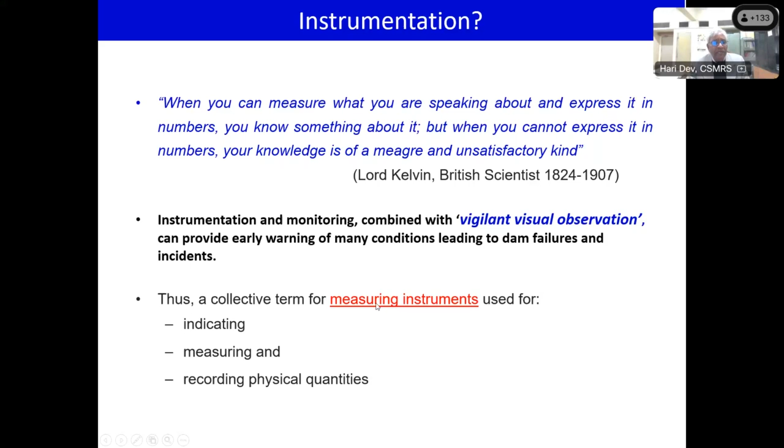Thus we can say instrumentation is the collective term for measuring instruments which indicate something. Let me clarify: these instruments indicate something in terms of numbers, and those numbers have to be further analyzed and interpreted with regard to our structure and our design values. Then those things can be analyzed and reported. So instrumentation is basically, though instruments indicate something, these parameters are measured, and these instruments record those parameters in physical quantities.

Coming to the number of large dams in India, India ranks third in the world in terms of large dams, this is data from 2023. So almost 5,700 large dams exist in India. But the status of instrumentation is, I'd say, quite dismal. Though field instrumentation initially started way back in 1930, still if I talk in terms of the dam population in India, almost about 5% of these dams are instrumented.

And coming to meaningful instrumentation, out of that 5% also, our experience says it is very dismal. When I say very dismal, it is a term that relates to the installation and monitoring. If we do monitoring, then we don't do any analysis or interpretation. And even when we do some interpretation, the data is not being properly utilized for design verification or for rehabilitation or remedial measures.

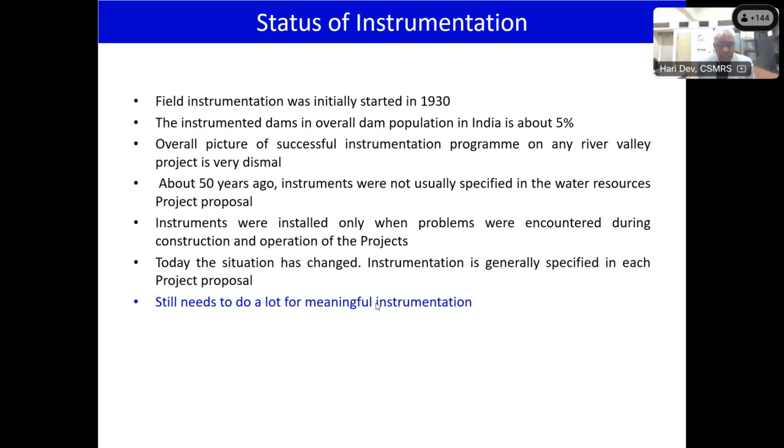Today the situation has changed, but instrumentation is generally specified in each project proposal, and our Dam Safety Act also stipulates that instrumentation should be part and parcel of our dams. So there is still a lot to do for meaningful instrumentation. Our experience shows we are involved in instrumentation during the construction of dams, during operation and maintenance, and during the planning stage also. So our experience is that we still need to do a lot for meaningful instrumentation.

So then what he does, he just takes out one thermometer or one stethoscope and measures something, and if he feels something, then he recommends some sort of further investigations, and on the basis of those investigations, he recommends the treatment. But suppose he acts on wrong information which you provide to him, that may be disastrous.

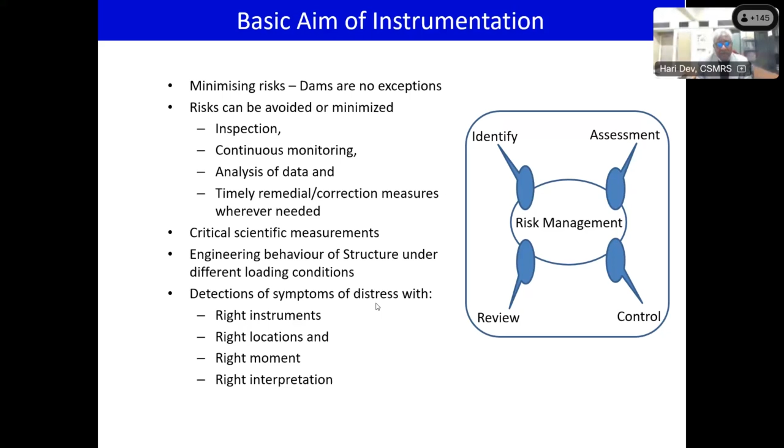So risk management includes identifying those risks, then assessment of those risks, then controlling those risks, and finally you review those control measures. So the purpose of instrumentation is detecting distress at an early and preventable stage.

So instrumentation doesn't protect our structures as a whole, but protects in an indirect way. It provides information at an earlier stage, when distress can be prevented through recording quantitative data analysis. The secondary purpose of instrumentation is for designers.

Designers take input data from geotechnical investigations and material properties, but sometimes they assume certain parameters, taking those derived from empirical correlations or earlier experiences. So it is not necessary that all the input data being used has actually been obtained from tests performed in the field or lab - certain parameters are still assumed by the designer based upon experience.

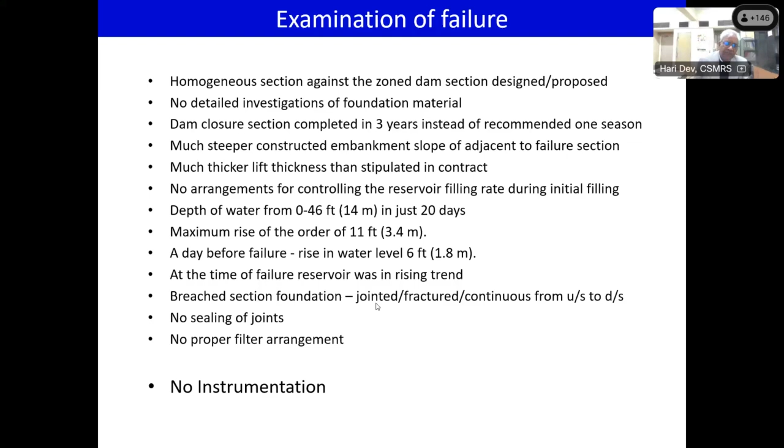No instrumentation was designed. Had instrumentation been taken up in the earthen dam, if we had installed piezometers at certain sections, it would have provided information about the piezometric heads at different sections on the downstream slope. From there, you get an idea of how your phreatic surface is being generated, so you can get information before the failure actually takes place, and avoid the failure rather.

So after that, the rehabilitation started. Of course, rehabilitation is time consuming, costly, and requires additional resources. Rehabilitation works were taken up, and during the rehabilitation stage, detailed foundation investigations were done, curtain grouting was done, mapping of the subsurface ground conditions was done, and a geosynthetic layer was installed. So we took all the precautions and revised the design also. It was rehabilitated back in '22, and now it's in operational mode.

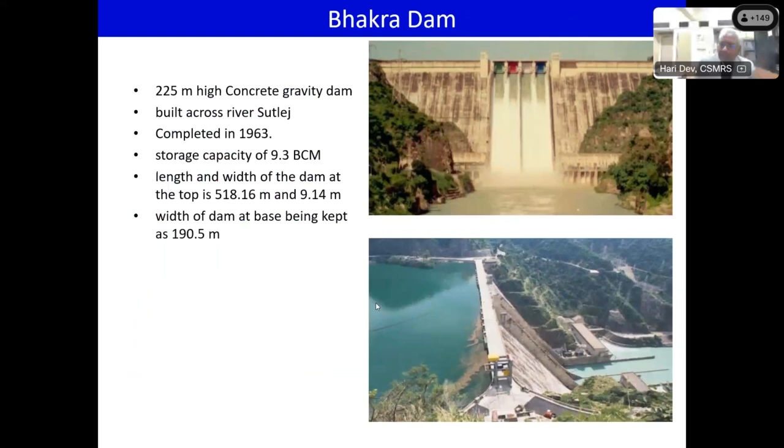Coming on to Bhakra Dam, it's a 225-meter high concrete gravity dam built across river Sutlej, completed in 1963, with a storage capacity of 9.3 BCM. Why I am taking this Bhakra Dam example is because it was designed by USBR, Colorado, USA, by trial load analysis.

After completion of the project, the reanalysis was again done with respect to stability and structural adequacy. The computed maximum deflection of the dam, as per the studies in 1964 after reanalysis, as specified by USBR, was 1.53 inches, 38.86 mm for seismic condition, and 1.03 inches, 26 millimeter for non-seismic condition.

Deflection in block 20, which is the deepest block, where the normal plumb line is situated, shows an increasing trend. During the years 1995, '98, 2008, '10, 2011, '13, the maximum permissible deflection has been surpassed. The maximum deflection measured so far is 1.11 inches, 28 millimeter, observed at a reservoir level of 1670 feet or 509 meter.

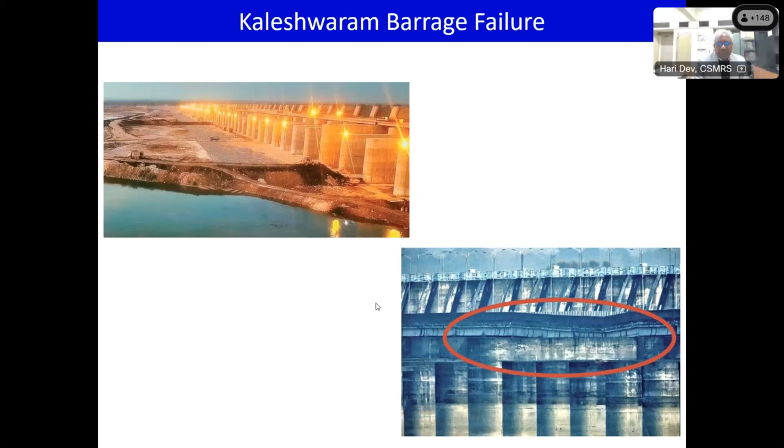This is one of the barrages, Medigadda barrage in Kaleshwaram dam. One of the blocks sunk by more than around 1.2 meter. Although investigations into the causes of distress and remedial measures are ongoing, we will probably get a solution and be able to rehabilitate this structure for use.

So from dam failures, we learn some lessons. Post-failure measures are much costlier than ensuring dam safety at an early stage. Suppose we do instrumentation during construction or during the operational stage, then that will be good for the structure.

Failures are not abrupt; rather, they are progressive in nature, so it doesn't fail abruptly. It gives ample time before the stresses and deformations exceed the maximum permissible values.

Ultimately, during failure, we witness loss of life, property damage, or environmental degradation, especially for high hazard dams near populated areas. So many things are at stake. Though the probability of dam failure is quite low, the consequences are very high, and sometimes devastating in nature.

Coming back to the objective of instrumentation, the basic aim is to develop safe, cost-effective, and reliable structures. Instrumentation can play a vital role in this. It can be used for site characterization, as many parameters are defined on the basis of field and lab instruments.

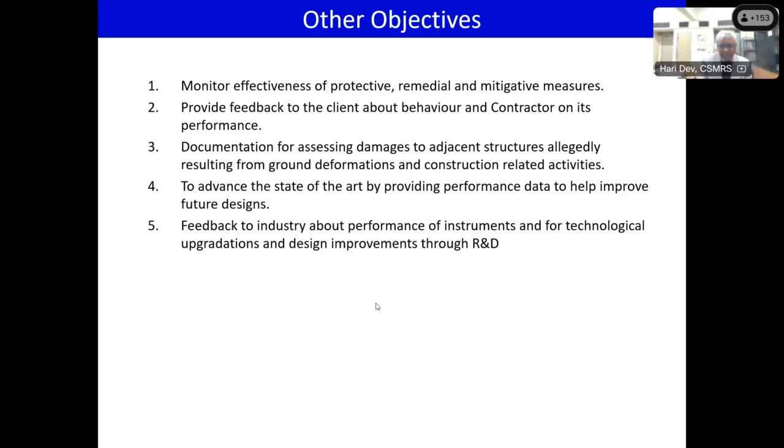Types of instruments can be mechanical, electrical, optical, or pneumatic. I won't say which one is more preferable, but each of these types can be utilized in different kinds of situations. One has to specify what kind of instrument will be more beneficial for their own structure.

Regarding observations, these can be done remotely or near the sensors, or the signal can be transmitted through a rod, through a liquid column, or through electrical optical cable. So many things are there—those technological advances are already available.

Planning and design of instrumentation: the first and foremost thing is to define the geotechnical questions—what kind of information, what kind of parameter you want to monitor for a particular structure, and what will be their range and accuracies. Select the parameter desired for the design, and then define critical values.

Critical values means what are the permissible values, and what are the critical locations where the instruments can be installed?

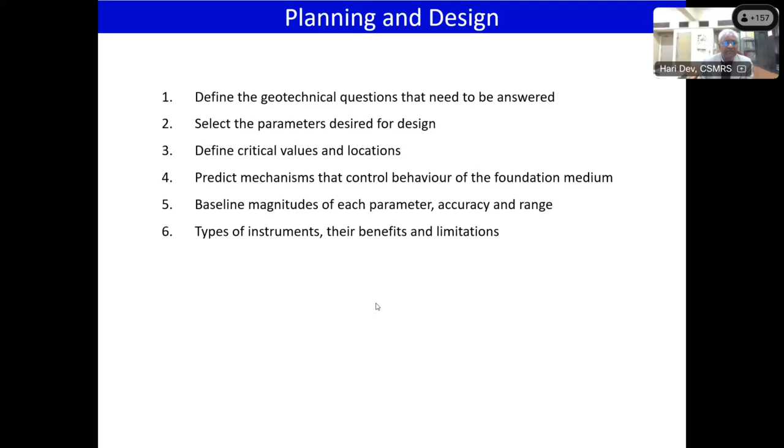Coming to the first thing, the instrumentation for displacement, load, deformation, convergence, any parameter, or water pressure, inclination—you decide upon it and then design and specify the instruments.

Then construction, monitoring and control—their design, verification and control, treatment control, and contractors' method statements, then third-party approvals, installation, commissioning, and baseline readings have to be defined.

Then you obtain and process the data. After installation of instruments, you obtain some data and then process it. That data is then used for a progress report sent to the parties. If the data is within the safe limits, then you straightaway report it to them.

If the measured data or parameters exceed the trigger values or permissible values, or the rate of change of any parameter is quite high, then you have to do some brainstorming and assess the instrument first.

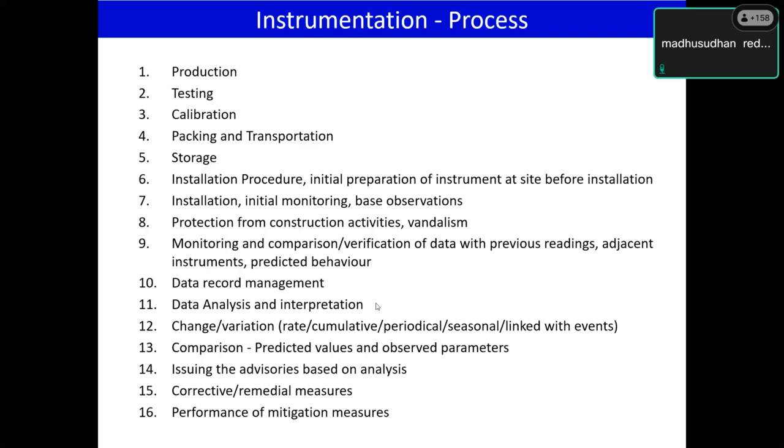So while production of instruments in the... I think somebody is unmuted. Please mute yourself. Dasam, please, somebody is still speaking. Yeah, please mute them.

So coming on to the process of instrumentation, it starts with the production itself. From the manufacturing unit, the instruments are fabricated or produced in the industry or the factory, and then those are tested and calibrated. Calibration is the most important thing. That is the first thing which tells us the performance of the instrument.

Then after calibration, packing and transportation to the project site, then storage at the project site itself. It has to be properly stored as per the specifications. Then installation procedure, initial preparation of the instrument at site before the installation.

Initial monitoring or the base observation are important. Base observations, why is this important? So that later observations are totally based upon the base observation. Protection from the construction activities, these are to be protected from vandalism. Monitoring and comparison or verification of data with previous observations as well as with adjacent instruments.

Why do I say adjacent instruments? Because sometimes if you see some abrupt changes in the observations, you need to compare it with adjacent instruments or some other parameters also, so that you are confident that the data is correct, for correctness of the data.

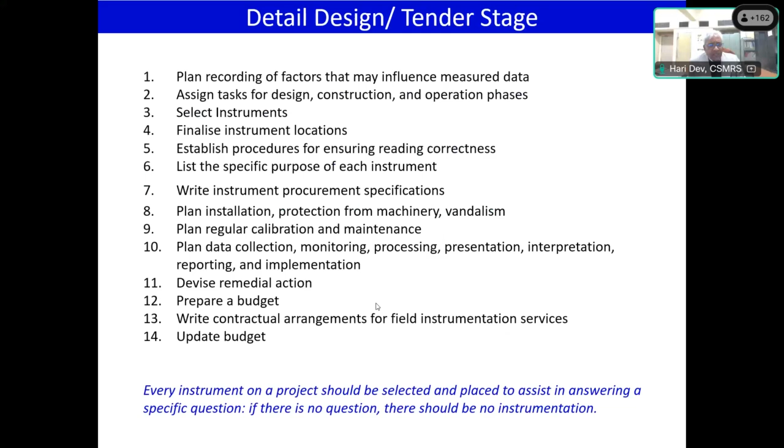So mind it, every instrument on a project should be selected and placed to assist in answering a specific question. Suppose there is no question, then there will be no instrumentation.

So in the design stage, you again identify the problems, identify the desired parameters, planning of instruments, then identify the suitable equipment, suitable locations, and assign responsibilities. During the design stage itself, you assign the responsibilities, how the data will be monitored and how the data will be analyzed and reported.

One thing is there - during design stage, we can visit the manufacturing plant also. So we can have some information about the technical specifications, for finalization of the technical specifications, that may be helpful.

In the construction stage also, apart from deciding about the instrument, their specifications and process of installation and other things have been defined. But now the monitoring - the installation and the monitoring - is more important. So the monitoring has to be done by the agency or by the owner itself. That needs to be defined.

Suppose the developer doesn't have the adequate capacity, then we can have an inbuilt parameter in the contract so that we can have persons from the manufacturing agency or the vendor for installation and monitoring of the instruments also.

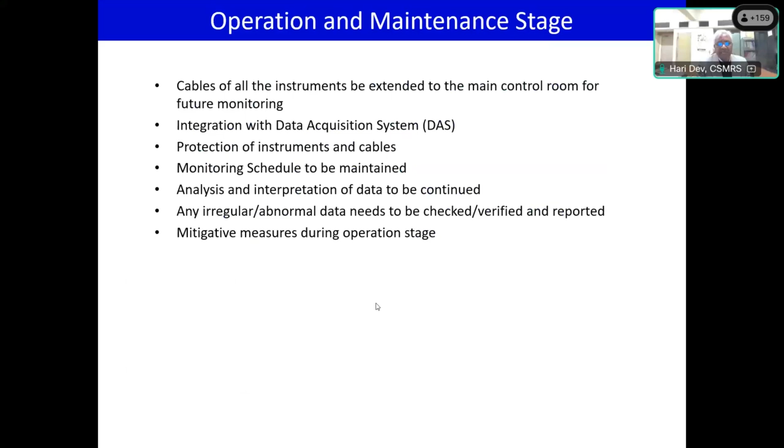In the first reservoir filling, this indicates early unusual behavior—such as the development of pore pressures in earthen dams, uplift pressures in concrete gravity dams, and dam deflections. Those things have to be monitored for satisfactory performance of the structure.

Then, understanding actual response—some new monitoring parameters, points, or components may be required. Maybe some instruments may be required on the dam abutments also during that period. So those things continue, and during the operational stage performance monitoring should continue, comparing actual behavior with design assumptions. Some parameters may not be required to monitor further, so we can redefine the frequency of monitoring.

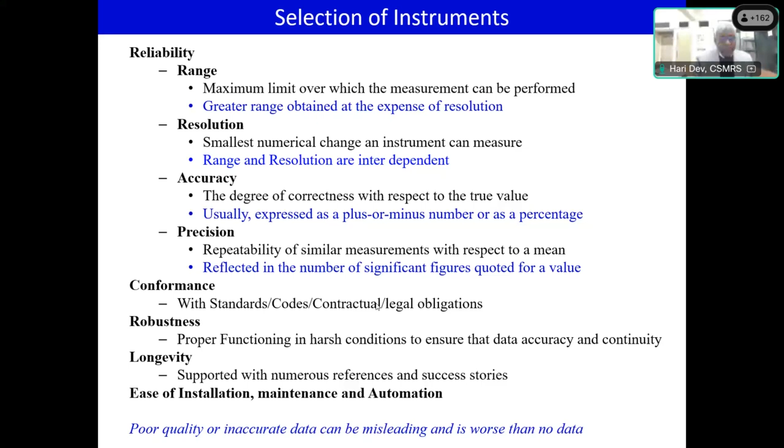One thing we should understand: poor quality or inaccurate data can be misleading and is worse than no data. No data is better than poor quality or inferior quality data. So, some principles of good measurements follow.

Hello? Somebody is unmuted. Yeah, please mute him. Yeah.

Some good principles: make the right measurement, choose the right instrument, the right people, demonstrable consistency, regular review, and right measurement procedures. One should not go by shortcuts.

These are some common problems in instrumentation: sometimes instruments do not work, sometimes they are not protected and vandalism occurs, sometimes there is wrong selection of instruments, lack of coordination between instrumentation and civil construction agencies, and sometimes we select too sophisticated instruments which may not be needed.

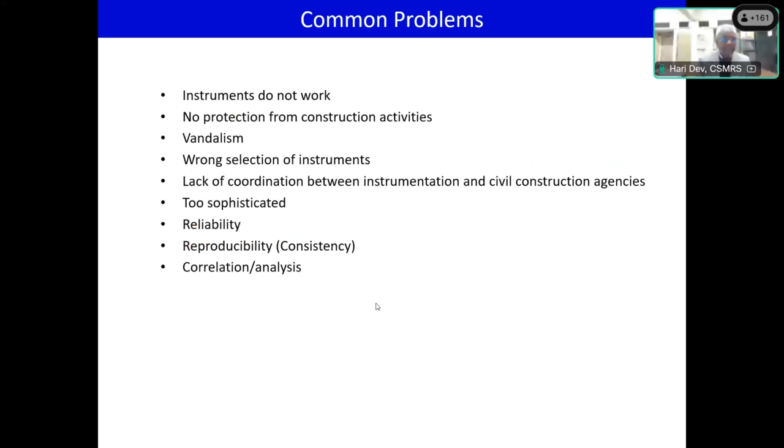Reliability, reproducibility, and correlation are some of the factors that affect the data. Inaccurate measurements, inferior measurements, selection of wrong instruments, improper locations, improper installation, delayed monitoring, and other things—these are the things which affect the quality of data.

Regarding presentation of data, many times we present data in tabular form, which is not a good practice. To me, graphical presentation is the best method. In graphical presentation, we can have a look at the earlier observation and the current observation all together, plotted since the installation of the instrument.

So we can have the assessment of the performance of the structure in various phases of construction.

In graphical presentation, there are two ways: cumulative change in any parameter, and rate of change in that parameter. Both should be included in the graphical presentation. Observed trends should be compared with predicted trends, and key designers should be involved and kept informed all the time. The data should be shared with the designers and the construction agency as well.

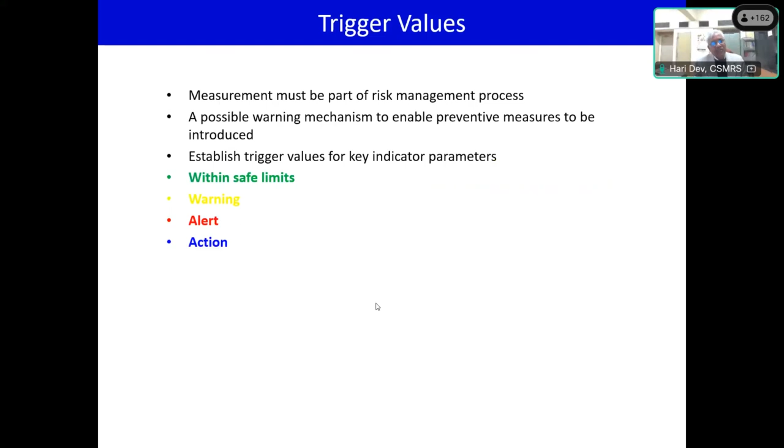Trigger values and measurement must be part of the risk management process, so we need to define trigger values. Usually designers define the permissible values, maximum trigger values, or warning values, and every instrument has to be provided with these. At what change in any parameter can we say it is within safe limits, or some warning is there, or alert values have already been achieved and it's time for action. So we need to define these flag indicators for each and every instrument. This can be done; it's not a big thing, but it should be followed.

So, setting the trigger values: observed variation in any parameter falling within expected limits is the baseline level. Warning level is when it exceeds the baseline level, and alarm exceeds the warning level.

Let us take the example of a load cell installed on a rock bolt. Designers may define different values, but just for explanation: the baseline value may be defined such that if it doesn't exceed 50% of the yield capacity, it is within safe limits. Warning is when it exceeds 50% of the yield capacity of the bolt, and we can issue a warning signal. Alarm or alert values are when the load surpasses 62.5% or 70%, whatsoever, of the yield capacity. Then it's time for action and time to define the causes of this distress or increase in load, and one has to take remedial measures.

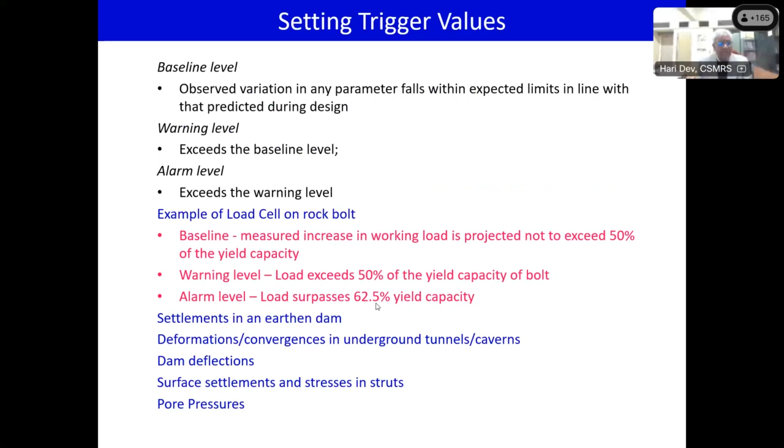Similarly, for settlements in an earthen dam, we normally define that 1% of the height of the dam can be the maximum settlement, but depending upon the kind of material, this can be lesser. During instrumentation, you can regularly watch these dam deflections and other parameters, so those values need to be defined at this stage.

Frequency of monitoring can depend upon hazard potential, age or condition of the dam, variation in loading conditions, history of abnormal behavior, seismic risk, different phases, nature of data, and climatic or seasonal variations.

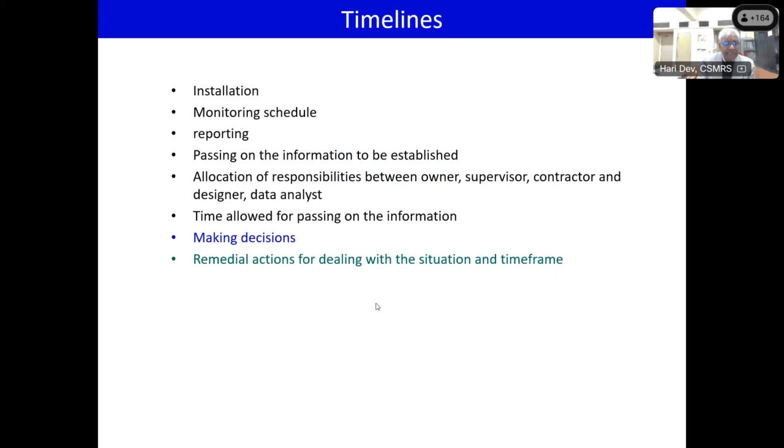Timelines are very important in instrumentation: timelines for installation, monitoring schedule, reporting, passing information to the concerned parties, and making decisions. These timelines at each and every level have to be followed.

So, good practices I have already covered; this part is over now. I will switch over to discuss the case studies.

Coming to the second part, implementation of instrumentation: in this part I will cover instrumentation for a complete project. I was on deputation to the Tala Hydroelectric Project in Bhutan, where we were associated with instrumentation of the dam and underground structures like the desilting chamber, HRT, powerhouse, and others. Apart from quality control and quality assurance, we were responsible for instrumentation of the complete project. I'll share that case study with all of you.

Apart from that, I'll share some other case studies of earthen dams as well as some underground structures, and I'll try to cover them.

Coming to dams in different phases, I've already discussed concrete gravity dams. Before going to the case studies, let us understand the different modes of failure in concrete or masonry dams. Common causes are overtopping, which might occur due to inadequate spillway capacity or issues with the gate. Sometimes the gates get stuck and we are not able to lift them, which may also be one of the reasons for overtopping or failure.

Spillway blockage resulting in erosion of the foundation or at the toe or even on the abutments, causing washout of abutment. Overturning is another way the dam can fail, resulting from high stresses at the toe. Foundation leakage is another factor or cause of failure in concrete or masonry dams.

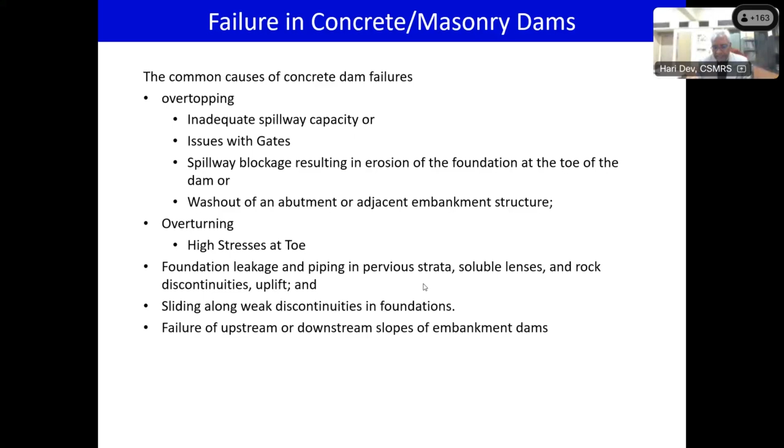Sliding along weak discontinuities in foundation is another cause. That's why we carry out in situ investigations for shear strength of foundation, both at the rock to rock interface as well as concrete to rock interface. Sometimes failure of upstream or downstream slopes of the embankment may also cause failure of the dam. These are the common causes of failure in concrete and masonry dams.

Now I'll go straight to the Tala Hydroelectric Project case study. This is the Tala Hydroelectric Project in Bhutan, a 1020 megawatt hydroelectric project under operation right now. The project was under construction from 1997 to 2006, and the first unit was commissioned in 2006. It contains a 92-meter high concrete gravity dam.

Extensive instrumentation has been installed in this dam, and our Central Water Commission was the main designer of the Tala Hydroelectric Project. Installed capacity is 1020 megawatt, and the gross head is 860 meters, which is the head to which the turbine units have been subjected.

It contains 6 units, 3 underground desilting chambers, and a 23.2 kilometer long head race tunnel, 6.8 meter diameter, mainly RCC lined, though some sections are PCC lined. It also contains a surge shaft and 4 steel lined pressure shafts, each measuring more than 1 kilometer in length, an underground powerhouse and transformer hall cavern, and a tail race tunnel.

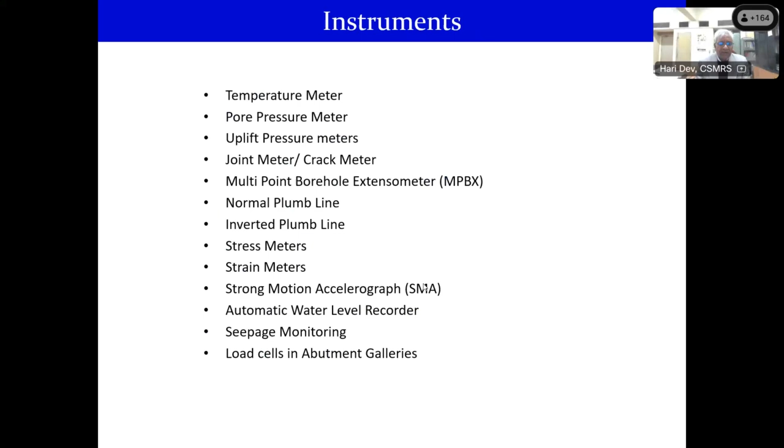These are the kinds of instruments installed in our dam. First I will cover the dam, then go to the underground structures. Temperature meters, pore pressure meters for measuring pore pressure of the foundation, uplift pressure meters, joint meters, crack meters at block joints, multi-point borehole extensometers in the dam galleries and on the abutments, normal and inverted plumb lines, stress meters, strain meters, strong motion accelerographs, automatic water level recorders, seepage monitoring, and load cells in abutment galleries. These are the kinds of instruments installed there.

This is the key feature of the contract, because this is the case study of a successful project with successful instrumentation. So how could this have been made successful? Some of the key features I would like to share with you.

Normally in our contracts, instrumentation is made a part or subset of the civil contract, meaning the instrumentation work is awarded alongside the civil contract, and the agency responsible for construction is also responsible for installation and monitoring of the instruments. This is not good practice, because the agency's tendency will be to push for higher or faster progress, while installation of instruments may hamper or retard the progress of construction.

So at Tala we included the supply, installation, and monitoring of instruments as a separate contract. One clause required the agency to depute a certified, experienced civil engineer at the project site responsible for preparation, installation of instruments, and monitoring of data. The salary of that person, along with one helper, was paid every month by the Tala Hydroelectric Project Authority.

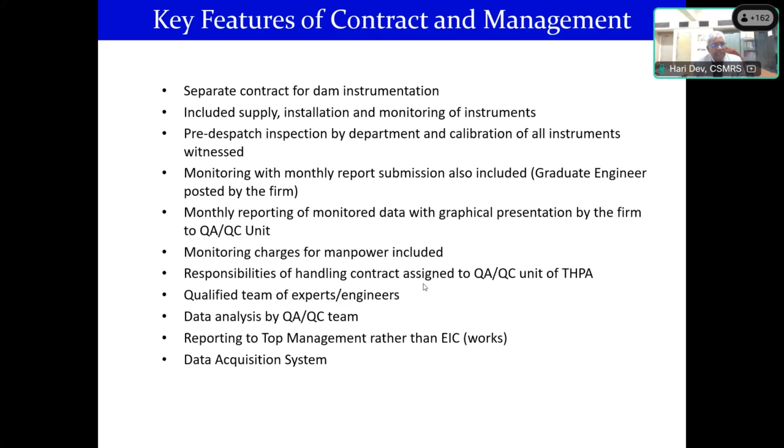One thing I would like to add, the agency's bills were being processed only after confirming that the instruments had been installed satisfactorily, and that they were giving meaningful data and being monitored. Only then were we processing the bills of the firm.

These are the initiatives, and for some other initiatives, coordination with the construction team, or protection from construction activities, remedial measures were undertaken if felt necessary. These were discussed during monthly progress review meetings, taken by the managing director alongside all the EICs, where the instrumentation data was also deliberated.

So these are the kind of instruments which have been installed. Around 296 instruments were proposed initially, 277 instruments were installed, and out of which, when we left in 2006 after completing our deputation period, 272 instruments were working perfectly and giving very useful data. That is the successful story of instrumentation of Tala Dam.

So 2 blocks were chosen for dam instrumentation. One is block 2, which is a non-overflow block, and the other is block 5, which is the overflow block.

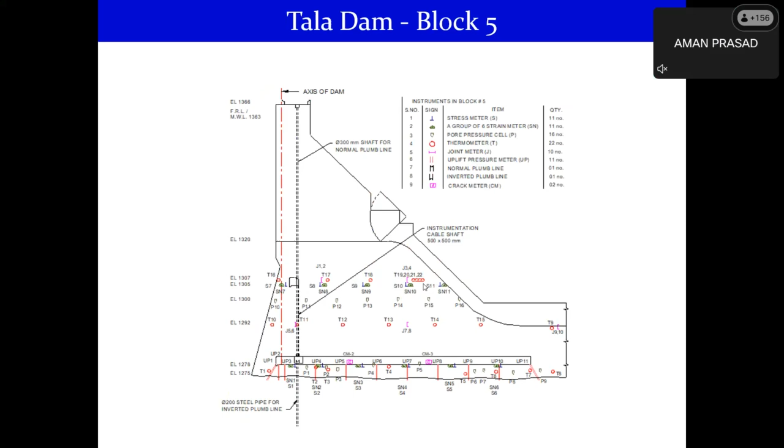Somebody is talking, I think. Let us mute, or kindly mute yourself. Some voice is coming, can you mute yourself please? Hari Dev sir, please go ahead. Some actual regular voice is coming, it's quite loud. Some disturbance there, can you mute it? Yes, all are requested, please mute yourself.

Okay, so I'll continue. So as I have already told, 2 blocks were chosen for maximum number of installation of instruments - block 2 being the non-overflow block, and block 5 being the overflow block.

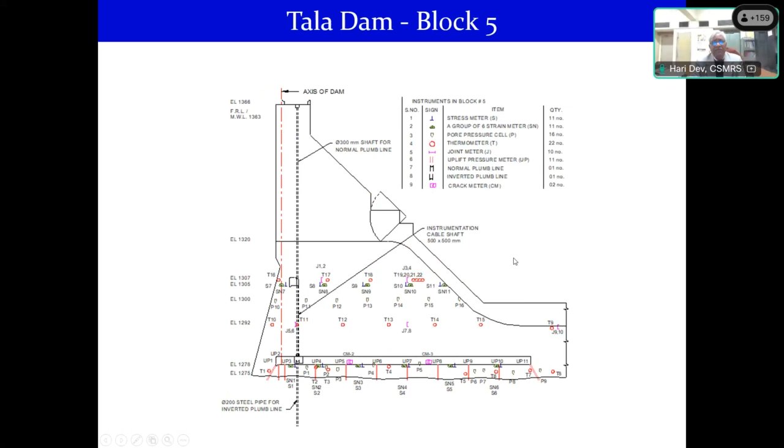These include instruments like uplift pressure meters, pore pressure meters, stress and strain meters, temperature meters, normal plumb line, inverted plumb line, joint meters, and crack meters wherever we observed some cracks. So all those instruments were included there.

Coming on to temperature meters - these have got very good significance and importance in our concrete gravity dam. In Tala project, the cement in mass concrete was varied from 200 kg per cubic meter to 140 kg per cubic meter, but that was not changed abruptly.

Initially 200 kg per cubic meter cement content was specified in the dam mass concrete, but later we observed that the lesser the quantity of cement in mass concrete, the lesser the thermal stresses, and it would amount to negligible or no cracking in concrete.

So we monitored regularly the performance of each and every mix, then in stages reduced from 200 to 190, 180, then 170, 160, and the minimum quantity of cement used was 140 kg per cubic meter.

So the temperature of mass concrete maintained at the batching plant was 10 degrees centigrade, so as to keep the heat of hydration under control.

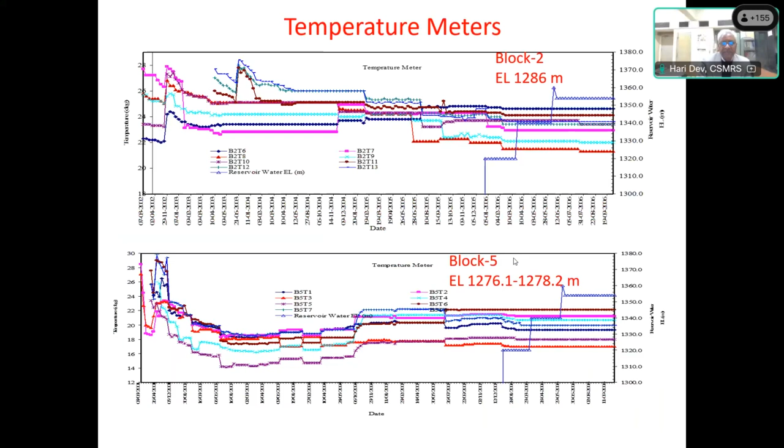So these are the plots of temperature meters. During the construction phase, these are very much important. The data from the temperature meters can be utilized to schedule our concreting schedule, to plan our concreting schedule. Once the temperatures, after the heat of hydration, normalize, then we can go for the next lift of concrete. You can also plot the variation in ambient temperature and the pore pressures within the foundation.

You can monitor the pore pressure during the construction phase, but the first filling is more important here. Joint or crack width also, every time you can continuously monitor. So at the block joints, these joint meters are installed to see any movement along the axis or across the axis.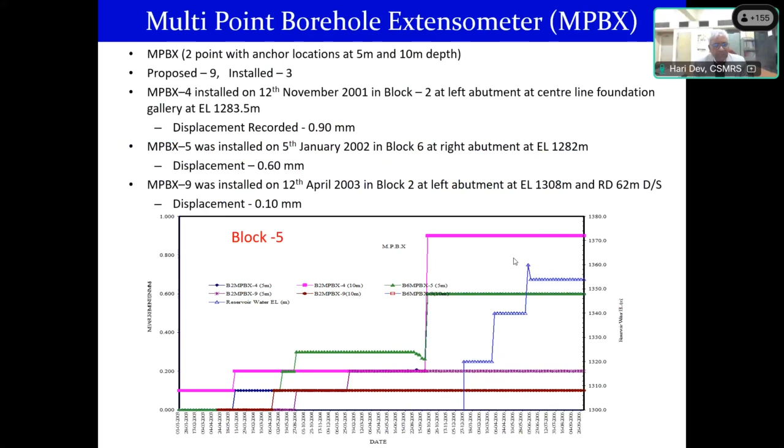So multi-point borehole extensometers have been installed in the abutment galleries. Although 9 were proposed, only 3 could be installed there. From those MPBX, the data indicates a maximum movement of the order of 0.6 or 0.8 or 0.9 mm. 0.9 mm is a quite negligible kind of deformation which we could get from the MPBX.

Normal and inverted plumb lines were in place. One thing I would like to say over here: while installation of this normal plumb line, this is the last instrument, among the last instruments which are installed in a concrete gravity dam. But this should be in place before the first filling.

Only then will you be able to know the effect of reservoir level on the dam deflections. Dam deflections are related to the reservoir filling. So before the first filling, these normal as well as inverted plumb lines should be in place. Here, before the first filling, which was taken up around December 2005, these plumb lines were installed, and then monitoring was started during the first filling.

If we see the maximum kind of deflection, it is around 8 or 9 millimeters or so from the normal plumb line in block 2, which is a non-overflow block. In the overflow block, from the inverted plumb line in block 5, it is of the order of 0.5 millimeter in the foundation. Both these deflections are within the permissible values, as expected.

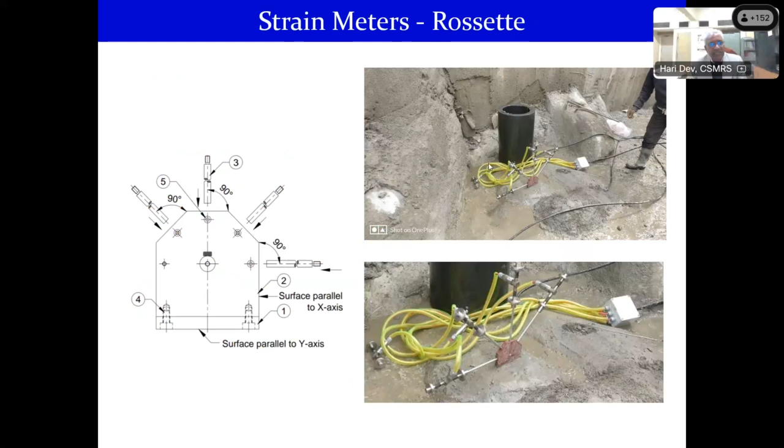It contains 5 strain meters which measure the strains, and one strain gauge is installed in a chamber like this, in a rubberized or plastic chamber, so that it is not stressed. Rather, it is called the no stress no strain meter. So the rosette contains 6 strain gauges, including one no stress no strain gauge.

In Tala, we installed 21 sets of strain gauges, so 126 strain gauges were installed there. These strain gauges have been installed in angular positions. Of course, this can vary depending upon the structure, but this configuration has been utilized in Tala.

These strains can be utilized to work out the stress at any particular location, assuming the modulus of the concrete, or getting it evaluated. The modulus of concrete can be calculated or determined by casting cylinders or cubes and testing them in the lab. From there we can calculate the modulus of elasticity of the concrete, and since strains are already known, you can work out the stresses.

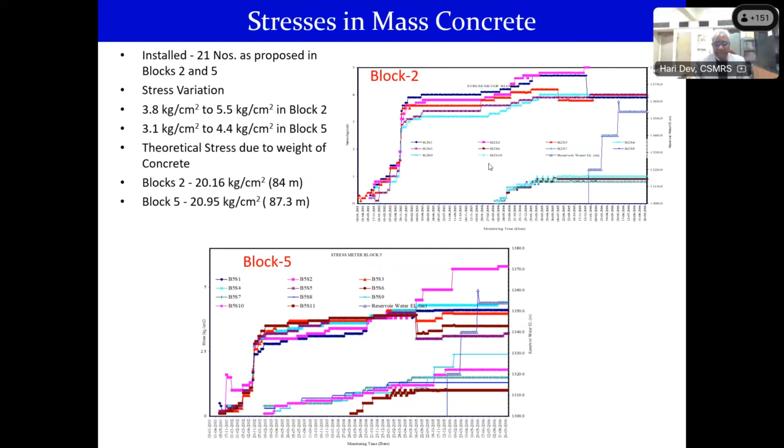The stress variation was of the order of 3.8 to 5.5 kg per square centimeter in block 2, and in another block it was of the order of 4.4 kg maximum. Theoretically, we worked this out from the weight of the concrete itself, and those blocks had quite high theoretical stresses. So the measured stresses are well within the feasible or permissible values.

Uplift pressure meters tell us about the pressures at the foundation, acting on the interface of the dam with the foundation material. These were installed in both block 2 and block 5, and from that data, during the first filling itself, we could monitor the uplift pressures, with the maximum pressure of the order of 12.5 meter water column, well within the permissible values. From there you can draw the uplift pressure diagram also, following the IS code.

4 strong motion accelerographs were also installed after the commissioning of the dam: one in the bottom gallery, one at the top of the dam, and two others, one on the left abutment and one on the right abutment. An automatic water level recorder can also be installed and placed to continuously monitor and record the levels.

Coming on to this case history of the dam which we undertook - this is of course a successful story I can say, but way back in 2006. Later on, what is happening we have no information about. But up till the commissioning of the dam, those instruments were in working condition.

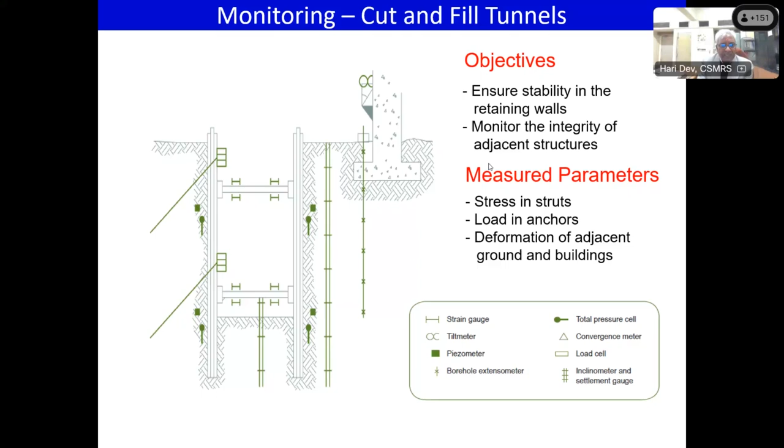So in shallow depths also, this kind of instrumentation program can be considered, which includes again similar kinds of instruments as in cut and cover.

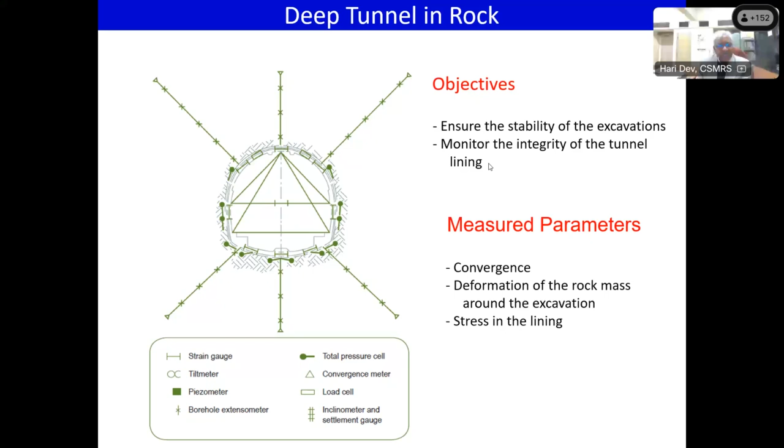Then in deep tunnels, we are concerned with the tunnel and its surroundings. Here we assume the tunnel is quite deep and the surface structures are not affected by the excavation. So we usually specify instruments like MPBX all around the adjacent periphery of the tunnel surface, and provide optical targets - depending upon the shape and size of the tunnel or cavern, these can be 3-point or 5-point measurements. In addition, we can have load cells on the rock bolts, load cells on the steel ribs if any, and piezometers to monitor the water pressure or seepage pressure in the rock.

We usually do inspection of all the chambers, but our team comprising the project and the designers and quality control, QA, QC, and all those involved, including the construction agency, take up the inspection of all the works before put into service. So all those chambers were inspected before filling for first operation.

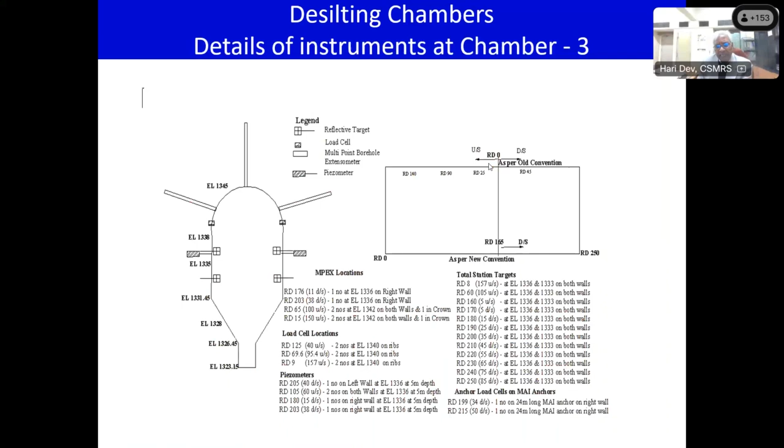Why that was taken: at one of the RDs, the maximum change or deformation was of the order of 122 millimeter. Visually also we saw cracks in the shotcrete lining at those places, and in the MPBX observations we could get maximum deformation of the order of 122 millimeter. Because of this stress condition in the desilting chambers, the design review was taken, and the steel rib arch support was provided there.

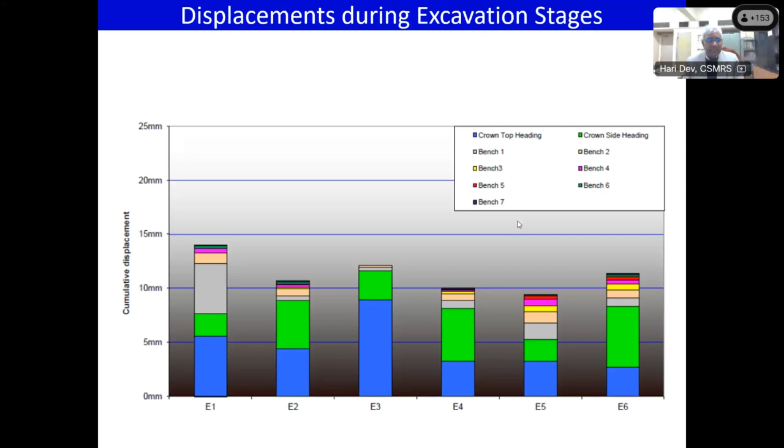So displacements can be plotted like this also, related to excavation stages including the first benching, second benching, third benching. You can plot these deformations and assess the performance of this structure. This is the continuous kind of graph since its installation.

Convergence of concrete wall from installation till completion, till you continue the monitoring - this has to be continuous. At different RDs and different elevations, the installed instruments can be plotted, and ultimately you can have a summary of these observations.

This can be done. So HRT, as I told, is about 23.03 kilometer, but as executed it is 23.032 kilometer in length. Diameter is 6.8 meter finished dia, and excavated dia is 7.8 meter. In some reaches where we witnessed very poor or very weak geological mass, the diameter has been reduced to 6.3 to 6 meter also. Excavation has been done in 11 phases, and around 290 meter length of the HRT was excavated in very poor squeezing ground conditions. I'll tell you a little bit about that particular section.

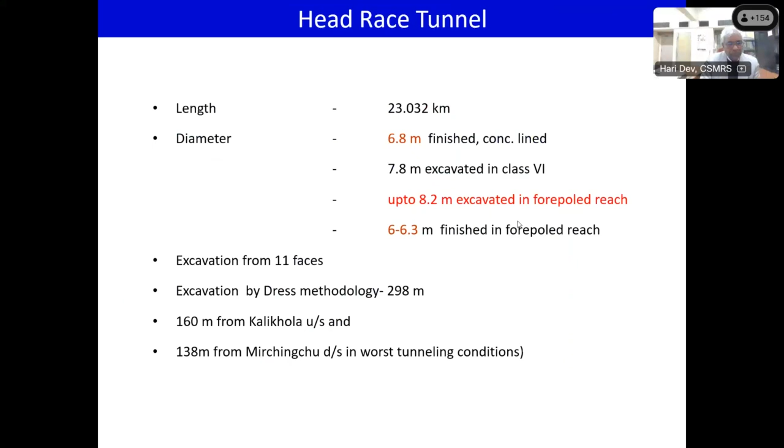I will be concentrating on that particular section. This is the plan of HRT, starting from the dam to the powerhouse, excavated from 11 faces. But here, where the bypass of HRT is, this part was excavated in very poor ground conditions - basically soil-like materials, very squeezing-like materials with water ingress.

Why do we need instrumentation in underground tunnels? Because during the initial stages of the project, during DPR or initial execution stages, many a times we cannot have comprehensive geological or geotechnical investigation all along the alignment of the tunnel. So on the basis of certain outcrops, we project those outcrops downwards through the subsurface, and then estimate or anticipate the rock mass conditions down below at the level of the tunnel.

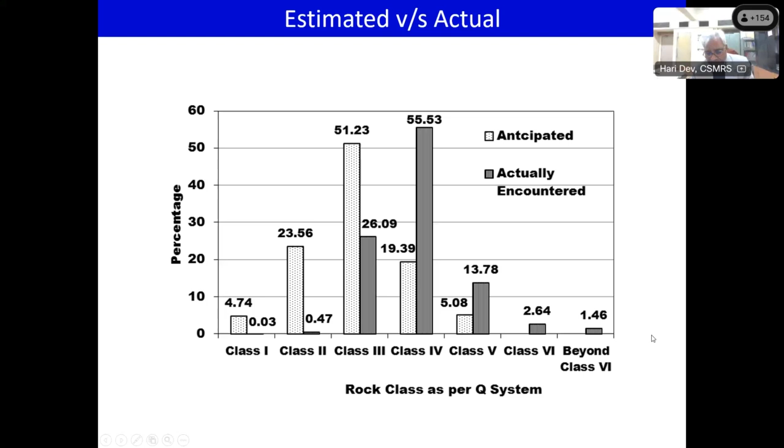But when you execute it, things might be quite different, as evident from this figure itself. You can see just the class 1 rock, how much percentage was expected and how much we could actually get - 4.7% was anticipated and 0.03% was obtained. Even in class 2 and class 3 and class 4, a similar kind of situation. In class 4, see the deviation from the anticipated and actual ground conditions. These final two ground conditions were not anticipated, but those were encountered.

And the section which I was talking about, the typical squeezing conditions in 298 meter, which has been overcome by this technology through forepoling and then support system installation.

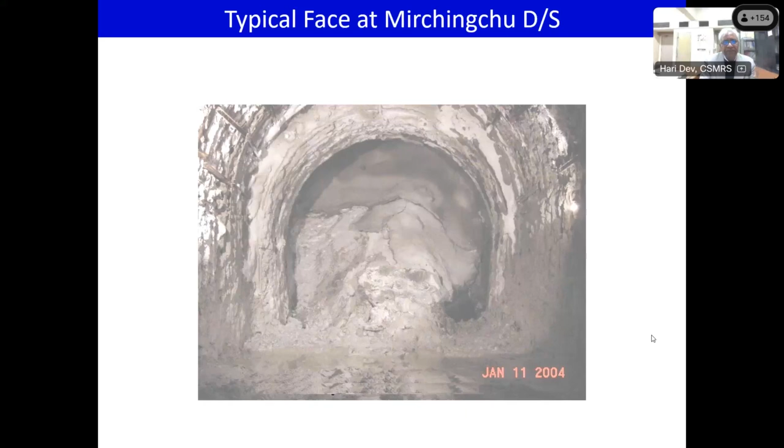So this was the kind of conditions in the very poor ground. So multiple methods were worked out: the multiple drifting method, and even polyurethane supporting was attempted. Forepoling was attempted, and microfine cement grouting was also attempted. All these things were tried, but we could not make that structure stable.

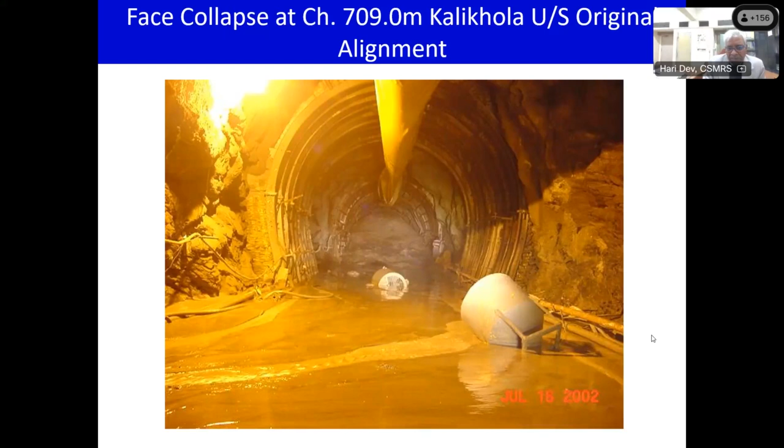Ultimately, a collapse occurred, and around 70-meter tunnel collapsed with mud, and fortunately there was no casualty. This is the kind of situation we encountered, and after that the face was plugged and then diverted.

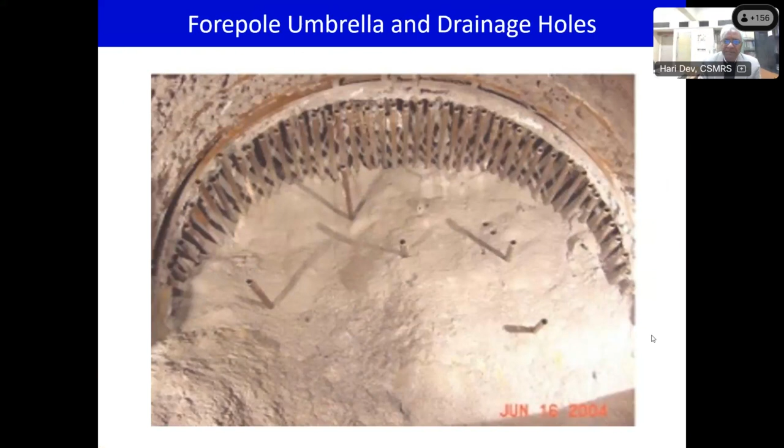The tunnel line was diverted or detoured from the original alignment, and again similar conditions were witnessed. But this time we were fully prepared to tackle these conditions, and we went for the forepoling machine. That machine was installed, all the forepoles were put in, and then we took up the construction activity. Treatment was done, and instrumentation was extensive and undertaken in this particular section.

22 sections in around 300-meter length of the tunnel was monitored. When I say 22 sections, that includes the load cells, the optical targets, and the piezometers. These are the three main instruments which have been installed over there.

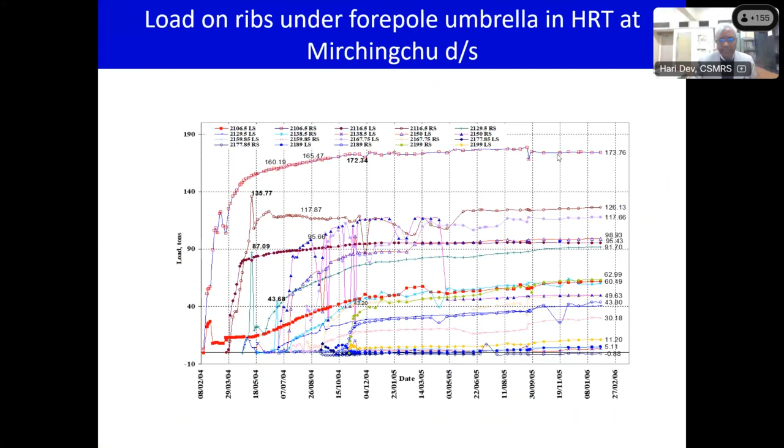In an underground tunnel, one should apply the final lining only after the loads and the deformations have already stabilized. So the final lining was undertaken after stabilization of the rock loads as well as the deformations or convergences.

So loads on ribs, these are the kind of graphs you can see. One should be prepared to analyze the data in such a manner so that it is quite easy for understanding.

Similar observations were there, similar trends were noticed just adjacent to this location. So that's why you need to have a comprehensive look, and sometimes when an instrument shows very abrupt or abnormal behavior, it needs to be confirmed also.

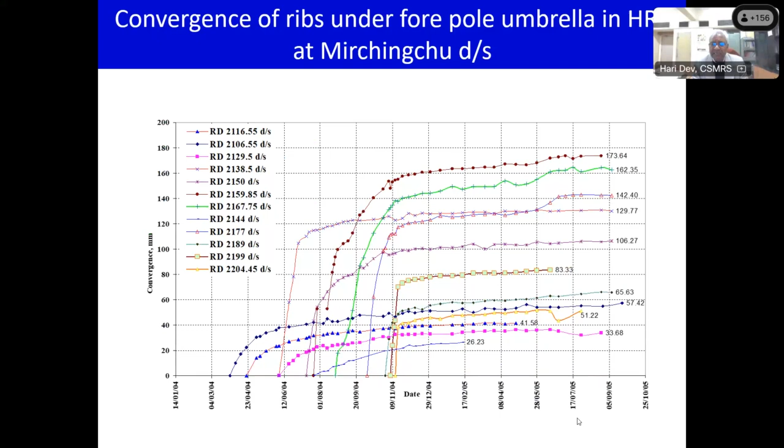This way we monitored this very vulnerable, very critical zone, and that helped in scheduling our concreting schedule after the deformations and loads were stabilized.

Again, what happened was when we were about to start the lining itself, we removed the muck from the invert, and then we witnessed one strange thing - these broken bottom studs, because it was a closed section.

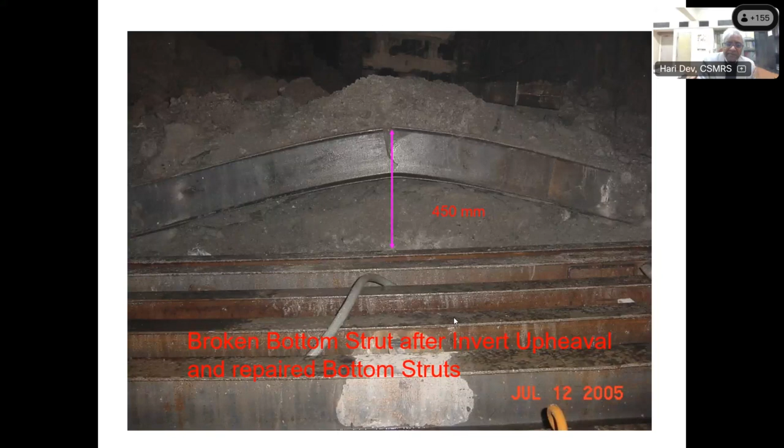So then we rectified those invert struts also before placing the concrete. And this upheaval was also monitored and calculated from the invert.

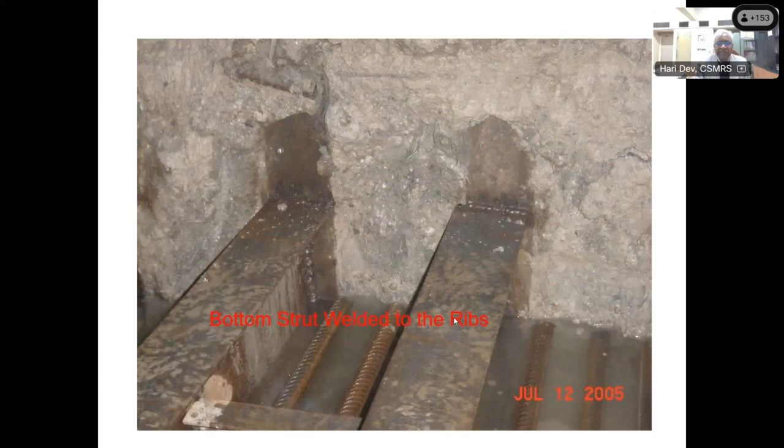So these are the modifications or rectification measures in the steel ribs. Inverts have been closed, and new struts have been provided like this, welded to the ribs.

And finally, lining was also an issue. Because in this section, two rows of reinforcement of 32 millimeter diameter, at a spacing of 75 millimeter center to center, was defined in the design.

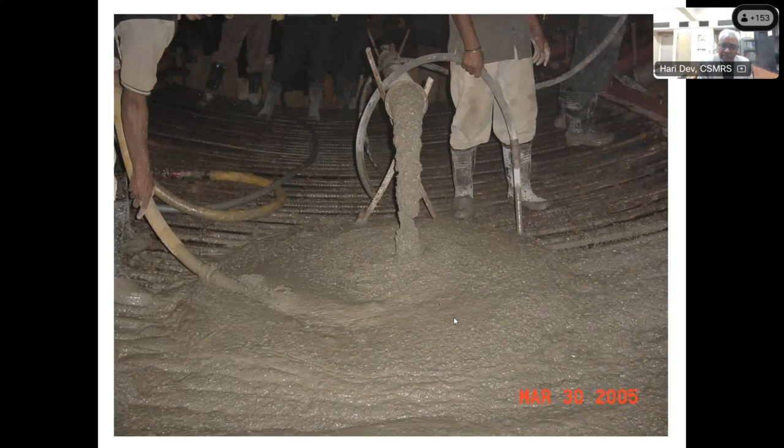Placing concrete in very harsh conditions of reinforcement was a big challenge. So we designed self-compacting concrete for this section, which requires minimum vibrations to fill the gaps.

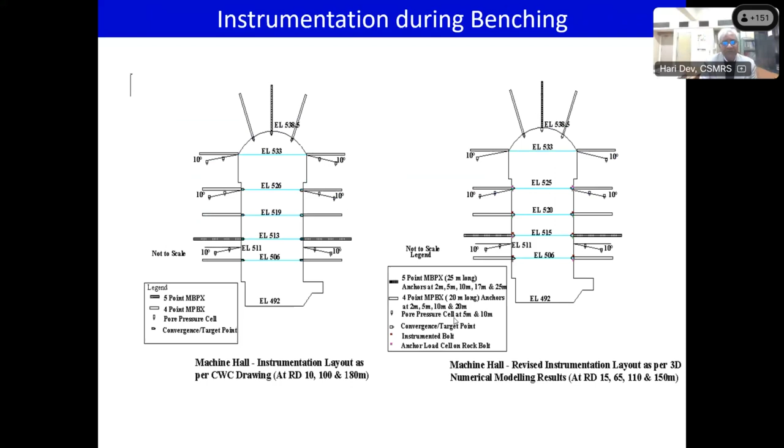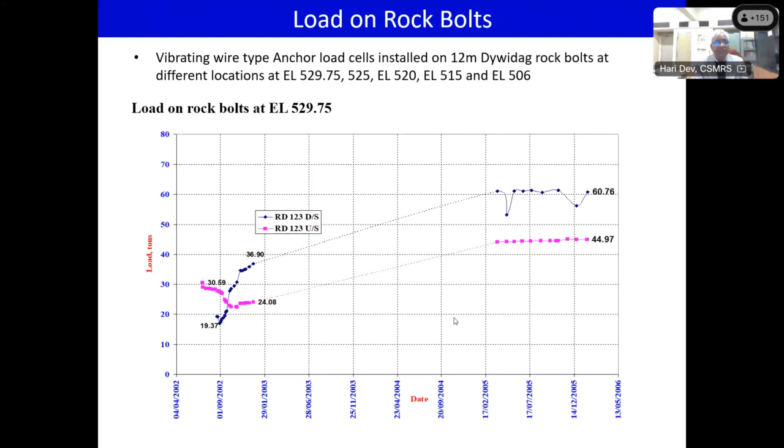This is again load on ribs at different sections, loads on rock bolts at different sections. These are the anchored rock bolts that failed during the excavation or construction process, based on the load observations. Maximum load on the rock bolts was of the order of 43-45 tons.

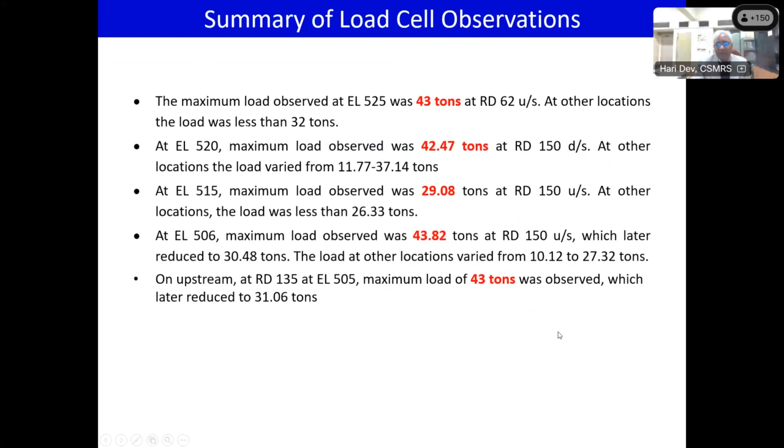Coming to convergence in the powerhouse walls, 343 millimeter maximum convergence of wall was observed at RD 65 meter. This is quite high, and it was continuing at that point of time. So to counter this, some design intervention was undertaken by the designers.

Initially we planned concrete columns for resting the EOT crane, but later we transferred to steel columns, keeping some space between the rock and the column for future convergences, if any. These design interventions helped in design reviews also, and this instrumentation data was helpful.

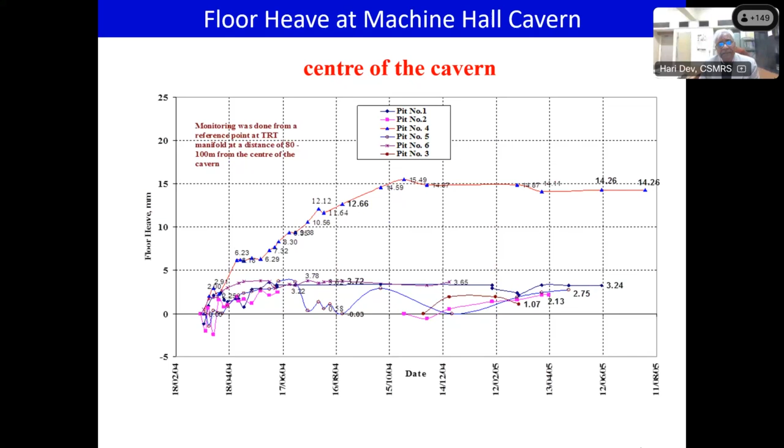Even here, while concreting for the generating machines, some cracks were noticed. Floor upheaval was witnessed, and that was also monitored using the MPBX installed in those pits. Once those convergences and the upheaval process had settled or stabilized, we went for installation of machines in all the units.

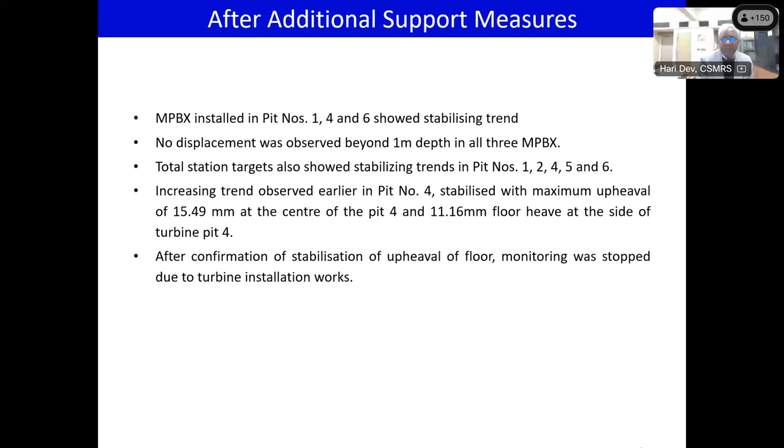Another study here we were involved in is the case study of the Tala project, which included the dam and the underground structures. Very extensive instrumentation was undertaken, and that helped in project execution and improving our design also.

So now I have another case study of Vyasi Dam. Vyasi Dam was put into operation in 2021. It's 2023, so I think with 10-20 minutes more I will finish here.

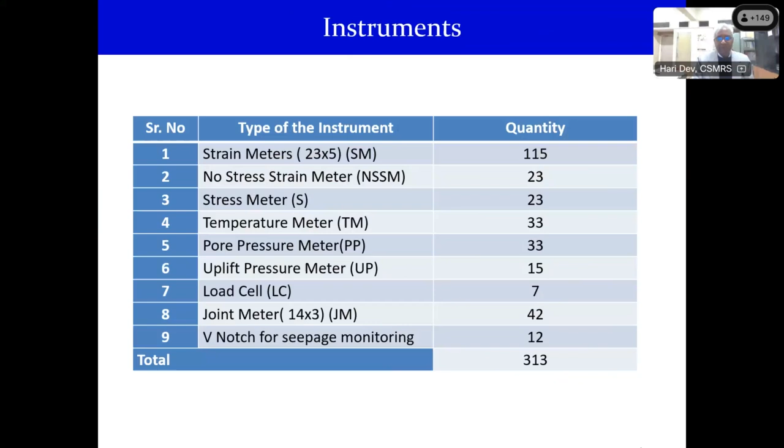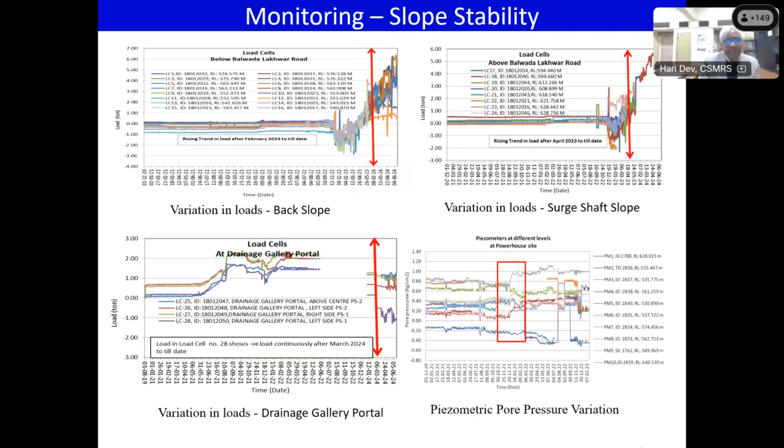When the water conveyance system gets charged, some changes in the adjacent rock take place because of seepage problems or saturation of the ground. From the monitored data, we could observe some changes in loads during that period, but those changes were quite minimal, not very significant.

Again, in case of piezometers, we witnessed some changes, but those were quite minimal. So from there, you get confidence that your instruments are working properly and your structure safety is ensured.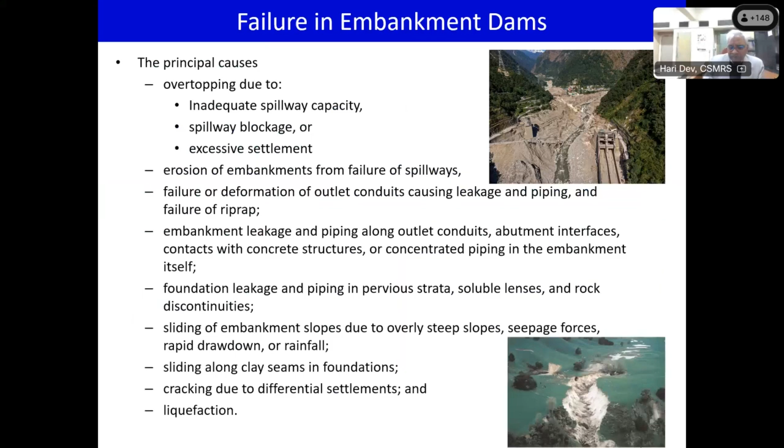So earthen dams - everybody knows the patterns and causes of failures in earthen dams: maybe due to overtopping, maybe due to piping, maybe due to failure of downstream or upstream slope, maybe due to sloughing, maybe due to rain cuts, or maybe due to some other factors like structural failure - upstream or downstream slopes can fail.

But these are the kind of early indicators of failures. Excessive settlement may be one reason. Increased seepage or turbidity could indicate piping. Sand boiling on the downstream. Settlements of an embankment crest or inelastic movement of concrete structures - at the junction of the concrete structure with the earthen section, those areas are vulnerable. Conversely, lack of normally expected natural phenomena may also be a factor.

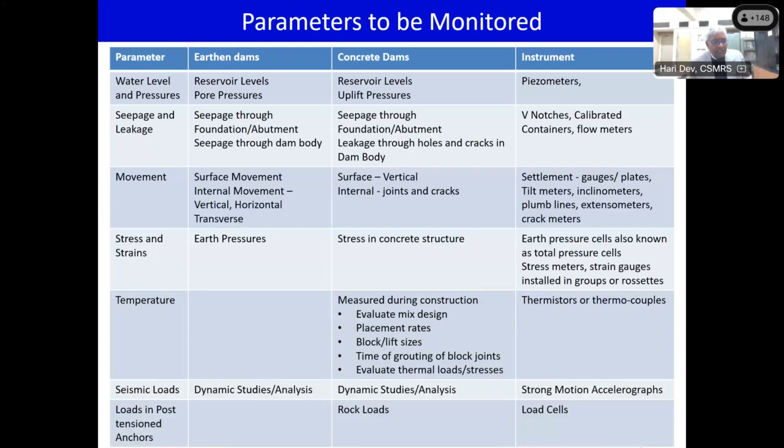So those are the early indicators of failure, and these are the parameters to be monitored in earthen dams and concrete dams. I have listed all the parameters for earthen and concrete dams. In earthen dams, we can have water level, pressures, seepage or pore pressure monitoring, stress meters, settlement devices, temperature, and seismic loads - all these kinds of instruments can be installed.

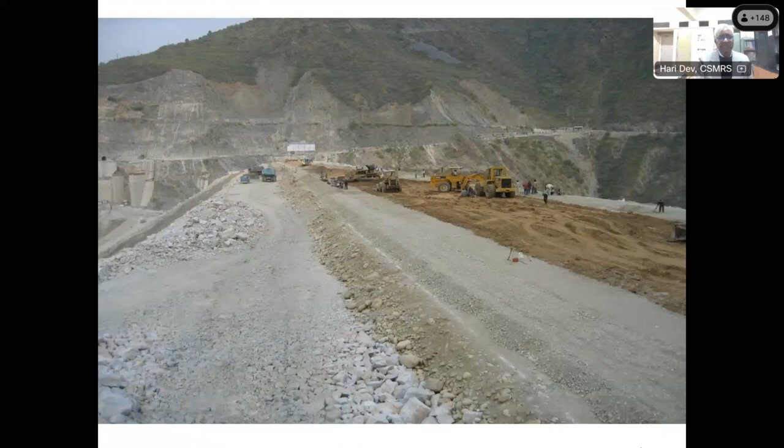Coming to the Tehri Dam, it's the highest dam in India, 260 meters high, and it contains two inspection galleries at 725 and 830 meters. This is a photograph of Tehri Dam, and these are project photographs during the construction phase. You can see the earthen clay core at the center followed by the shell material.

These are the kinds of instruments which have been installed: piezometers, vibrating wire earth pressure cells, vibrating wire thermometers, deflection and settlement devices, full profile gauge, horizontal movement gauge, and horizontal multi-point extensometers.

Three particular sections - B11, B7 and B15 - have been chosen for instrumentation. Some instruments have been installed in the valley section and some near the top embankment, and many instruments for surface settlements have been installed over there.

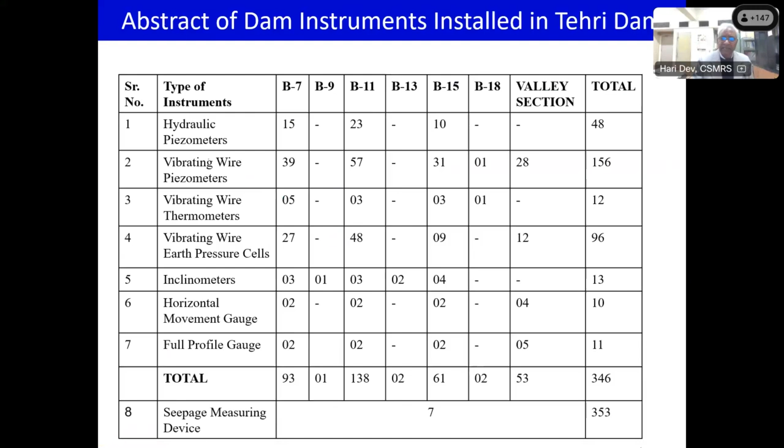These are the kinds of parameters monitored: hydrostatic pressures, pore pressure, seepage measurements, deflection, internal vertical movement, and opening of joints. This is one of the successful case studies in India for earthen embankment dams - Tehri Dam has a very good, well-executed instrumentation plan. These show the number of instruments planned.

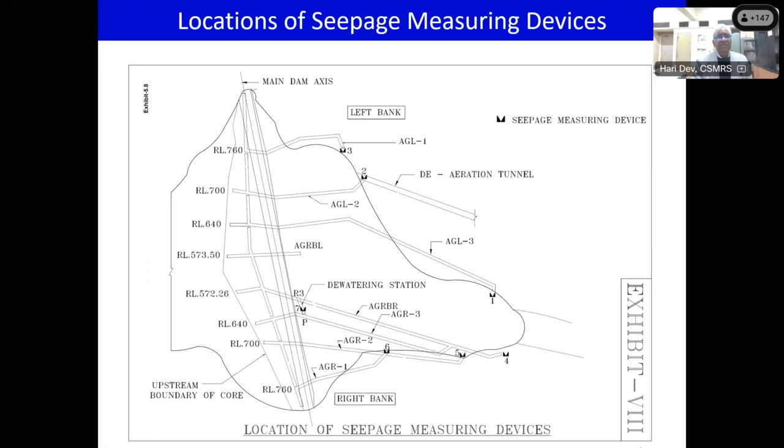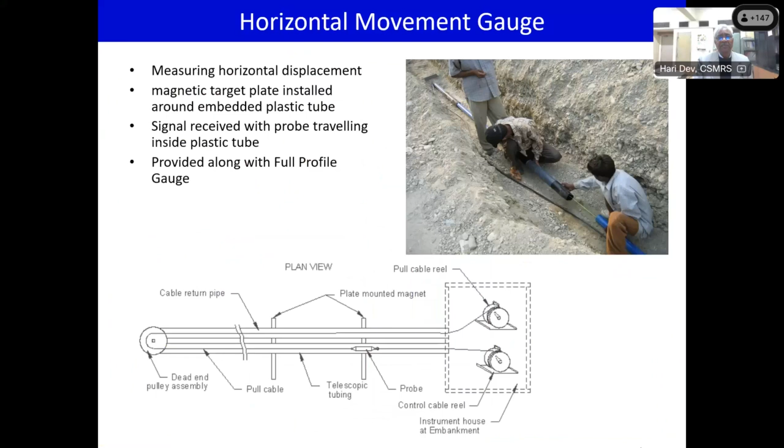Some photographs during installation of the instruments, and horizontal displacement devices. These show the installation of the horizontal movement gauge, full profile gauges, horizontal multiple point soil extensometers, and cable data acquisition system installed there. So an extensive instrumentation plan has been devised and implemented at Tehri.

This case study is small, but I'll take just 2-3 more minutes to conclude - it's the diversion tunnel of the Lakhwar multi-purpose project, presently under construction in very difficult or varying ground conditions, because it contains a lithological contact on the downstream and upstream of the dam, well within the desilting basin, or the contact penetrating into the dam body in the subsurface. This project is a 204-meter high concrete gravity dam under construction right now.

The project was started way back in 1990, but due to some uncertainties or very weak shear zones and lithological contacts that were abundant, it was stopped, and later in 2003 it was taken up for construction again.

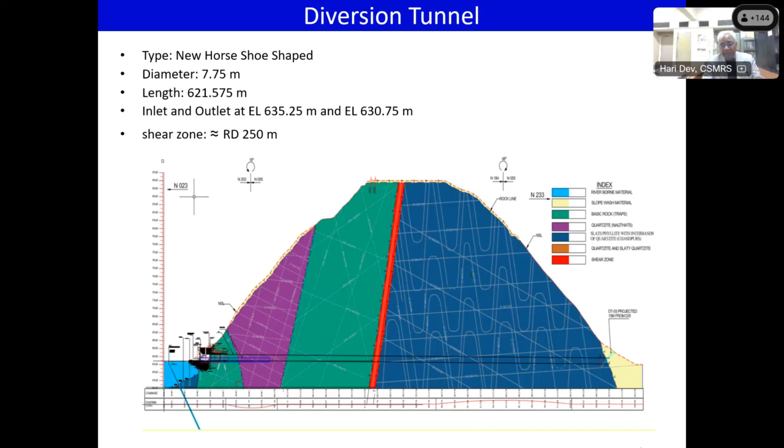We were expecting that shear zone to be encountered, that lithological contact to be encountered somewhere around 250-meter RD from the outlet side. Because from the previous investigations, though we can project it on the tunnel alignment, we have projected it, and this is the kind of instrumentation used.

So here we went for 5 optical targets only. 5-point optical targets have been planned and executed in this tunnel and are being monitored regularly. This is the kind of shear zone which has occurred at the expected RD, but we are monitoring regularly at different RDs.

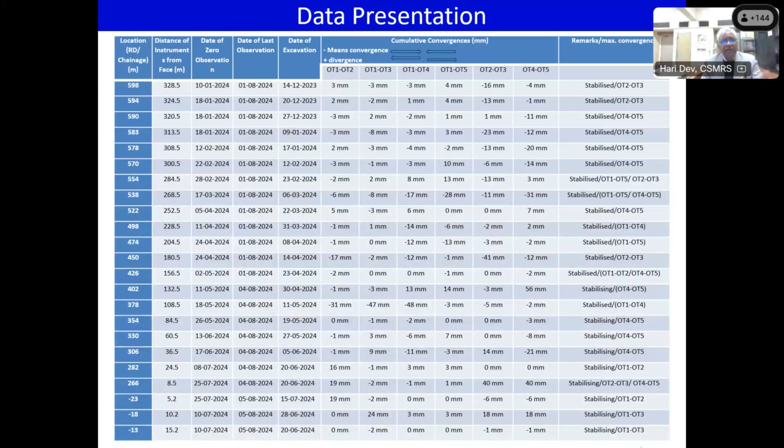This is the kind of sections which have been monitored, which are being monitored. Of course, many more sections have been added onto it, this has to be updated. So this data is again related to details of the instruments.

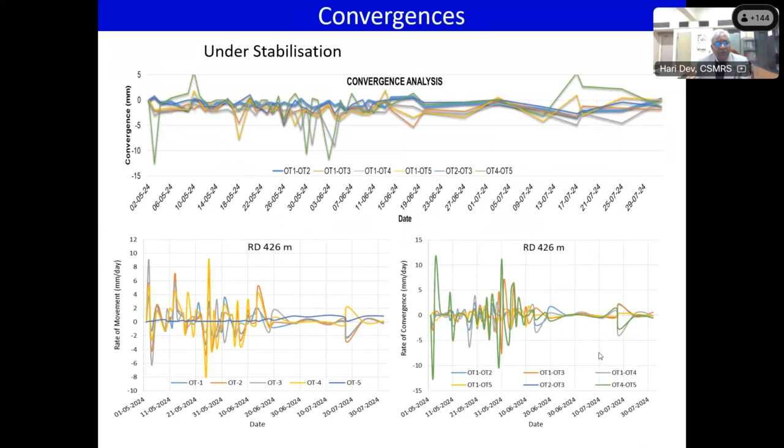So just to show you how you will say the stabilization, whether it has stabilized or not. In the topmost picture, I am saying that it is under a stabilization process, because the deformations are plus minus 5 to 10 mm, but within limits. On the bottom also, the same has been plotted, so you can say this is under stabilization and still active, still showing some abrupt changes in deformations.

So the sections are to be interpreted individually based upon the visual inspection we'll be doing, which is most important. I'll say compare with the previous observations immediately, continue the data in graphical presentation—total deformation, convergence, and rate of change with time—you can monitor and assess. Monitoring schedule you can prepare and go on modifying it. Final word: whether stabilized, under stabilization, or active state, you have to define it.

Minor variation in data should not be taken lightly, till it is for sure. Word of caution at critical stage.

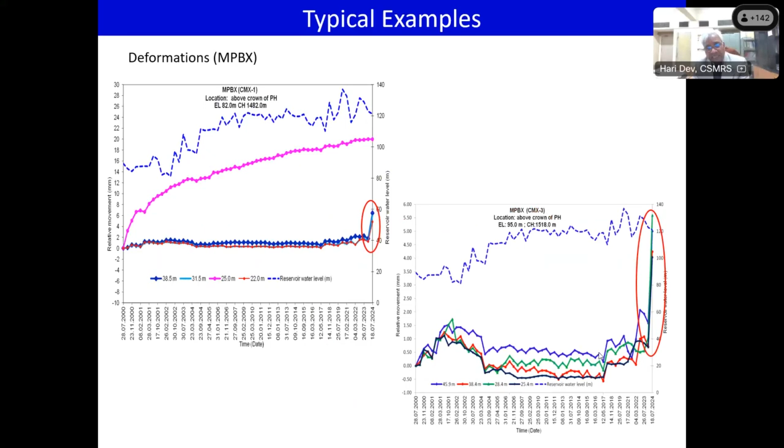These are some typical examples of how these plots are used for interpretation purposes. This is one of the figures from one of the major projects in India of an underground structure, wherein an abrupt change in deformation in MPBX occurred, and while deliberating or discussing, the cause of that change was also ascertained—the variation of the normal plumb line with the change in reservoir levels.

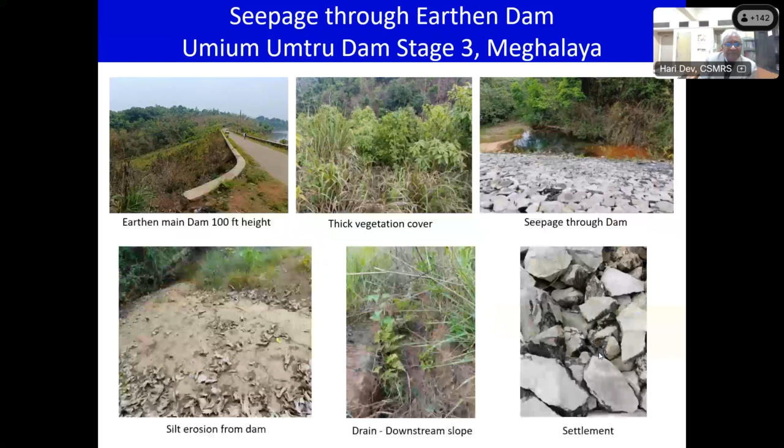So, my concluding remarks: the instrumentation offers scientific and convenient tools for periodic inspection of the structure. It facilitates verification of design assumptions and adoption of timely and appropriate remedial measures to avoid aggravation of distress. Still, it is unrecognized, and instrumented only when in stress, considered a hindrance in work progress. Installation timing and proper procedure has to be followed. The instrument should be simple but reliable.

Before investing in technology, invest in people. Training or capacity building should be considered. And then some of the lessons: no instrumentation is better than bad instrumentation. Data once lost is lost forever. Therefore, deformations in underground excavations had to be arrested or recorded timely.

Keep your eyes and ears open. Visual inspections serve as a verification tool, even in case of malfunctioning of instruments. A small amount of true, accurate, reliable, and realistic data is far better than a large amount of inaccurate and erroneous data.

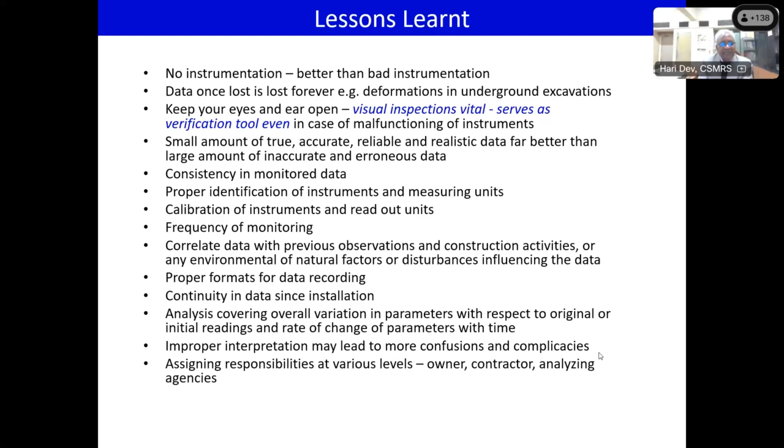Consistency in monitoring data should be there. Proper identification of instruments and measuring units. Frequency of monitoring, proper formats have to be used. Assigning responsibilities at various levels. Those are the kind of lessons learned from the previous work.

Monitoring and instrumentation. So with this, I end my presentation over here. Any sort of queries or questions are most welcome.

So thank you, sir. Thank you, Hari Dev Saab. Thank you very much. You have very rightly elaborated all the perspectives of this dam instrumentation. Actually, the conclusion, I was just looking up to this, reading all the lines of the conclusion. Definitely this will help a lot, because after putting instruments, their analysis and timely remedial measures, first of all, their interpretation is very tough, very complex. It's not so easy. If instruments are not calibrated properly, then it gives the wrong signal also many times. So all these points are very important.

And now the floor is open to all the participants. They can have questions. Hari Dev sir will take it happily. Sir, yeah sir please. Hari Dev sir, Namaskar.

This is Raghavendra Kumar Gupta, and I want to ask you regarding the Tala project. You had done very nice instrumentation and interpretation also. That timely installation of instrument and protection from damage from the construction activity is very important. How did you manage this protection and timely installation, and what was the lag between the excavation of the face and installation of the instrument? These are my two questions.